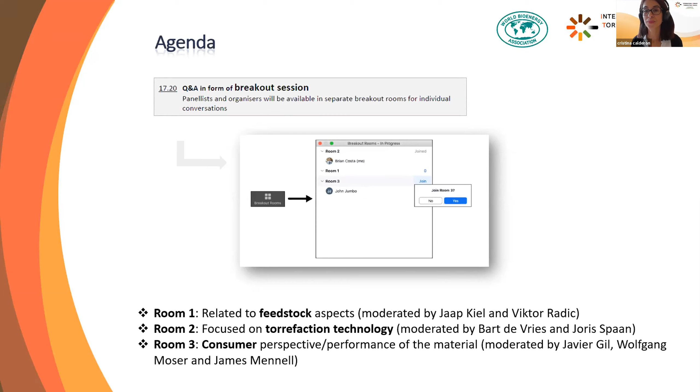On behalf of the World Bioenergy Association, our association has in the last couple of months organized a whole series of webinars on the use of agricultural residues as a feedstock for energy generation. We covered different aspects from the combustion technology all the way to the logistics, to different ways of compacting agricultural biomass. And torrefaction is, of course, one more technology to make this material, which in its original form is not very useful as a fuel, into something that is useful, that can be used in different plants, in industrial plants, but also maybe in medium and small scale plants. So I think the interest in this subject is great.

The International Energy Agency, in its scenario for net zero that was published a couple of weeks ago, which is really a landmark publication, has indicated that agricultural residues will play a very important part in the future of the world's energy consumption. Overall, bioenergy will contribute at least 20% to the entire energy demand in 2050, according to this scenario.

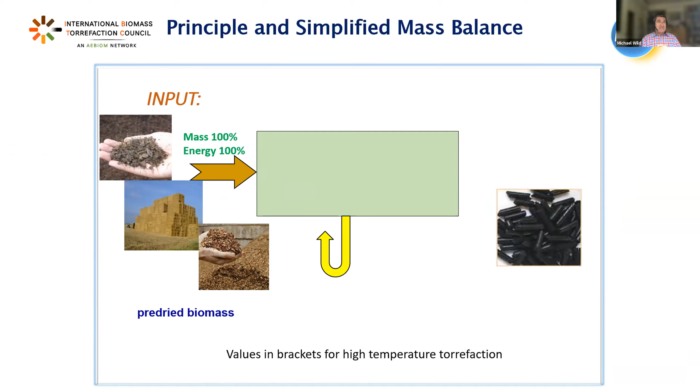So when you put dry mass into a reactor or any other device that heats up the biomass to 300 degrees or more, then you start to split the biomass, you drive out the volatile matters and you concentrate the solid matters, very much dependent on the temperature and the residence time in the reactor and also the technology applied. You achieve a mass loss of 30% combined with an energy loss of only 15%.

This is when you produce or you dedicate your production towards fuel, where you try to have a lot of the mass concentrated into the solid fraction, a lot of the energy concentrated into the solid fraction, still achieving all the characteristics of a coal or a charcoal, so brittleness, water resistance.

If you go higher in temperatures, you drive out more of the volatiles. The volatiles tend to pick up more of the energy from the input material, and your energy balance looks a little bit different. You concentrate the solid biomass higher in carbon, so the energy content is much higher and the calorific value is going to be higher. Would we go to the next slide, please?

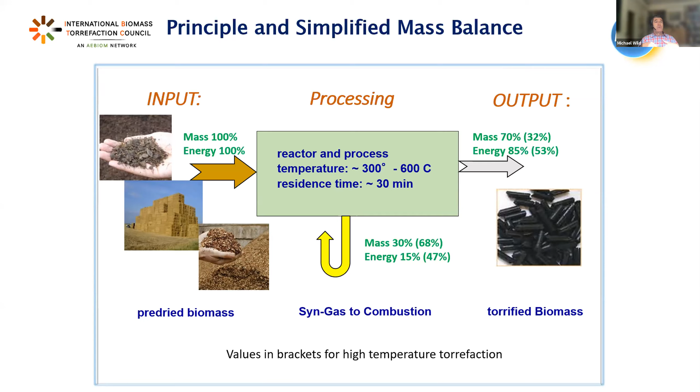We will increase the calorific value up to 21, 22, 23 gigajoule gross calorific value. That seems to be a sweet spot if product is dedicated for co-firing in coal power plants, because here we have a sweet spot in efficiency for the process and for the supply chain.

Going higher in temperature, very often the expression pyrolysis is used, and if we go even higher in the carbonization, meaning we increase the temperature to 600, maybe even 700 degrees C, we speak about carbonization or high temperature torrefaction. Here we drive out 80 to maybe 90% of the volatiles, meaning that the carbon content in the solid biomass then is 75% or more, and we fall already quite well also under the definition of charcoal.

Torrefaction is such, and we look here now into the energy balance, and I addressed this already briefly. Torrefaction, if you go into standard torrefaction, sweet spot is about driving out 30% of the volatiles, meaning approximately 21 gigajoule net calorific value of the final product. Christina, please. That provides an efficiency for the whole process of about 77%.

When we look into carbonization, it is important to understand that quite a lot of the energy is lost into the gaseous phase. So not all the energy is left with the solids, but there is a lot of energy left in the gases. Now, that from an economic point of view, but also from a sustainability point of view, means something has to happen with the gas. You need to create value from the gas, either by using it thermally, meaning running all the process for drying and the carbonization with the energy in the syngases, but usually there is a surplus in syngases, which could be easiest used by turning it into heat, which then could be turned into steam or any other purpose.

How does a plant that torrefies biomass usually look? Basically, the process always starts with driving out the water. So we always have a dryer. The dryer is very much designed for the individual feedstock, be it wood, be it an agricultural biomass, be it a belt, be it a drum dryer, whatsoever.

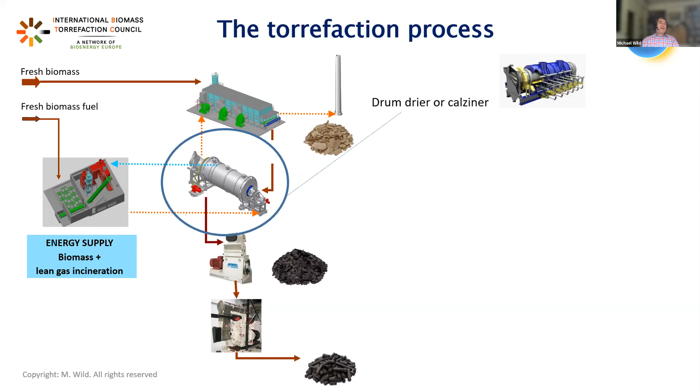From the dryer itself, the next steps are the high temperature application in maybe a drum reactor, which could be, as said, in one step or in a second step. After the thermal treatment, there is a cooling, so the biomass needs to be cooled down, will be milled, and will be compressed into either briquettes or pellets.

What kind of reactors are common today? We see that there is a big variety of different reactors. None of them can claim to be the best reactor for torrefaction or for high temperature torrefaction. There is always a trade-off between what feedstock needs to be treated to what product. And only under this framework can you define which one would be the best of the different reactors for you.

We see that we have drum dryers or calciners which are operated at high temperatures, sometimes even with microwave supplement. We have auger or screw type reactors, vibrating belt reactors, multiple hearth reactors or dryers. We also have pressurized or non-pressurized moving bed reactors, which were quite common in this type.

As said, there are different integration approaches. There are also batch processes which are not described here. The reactors here are always seen in continuous processes. For very high carbonization, we see on the other side also certain batch processes finding their way to market and being quite successful. Next slide, please.

One of the biggest advantages of integrating the thermal treatment process into biomass processing is that through thermal treatment, you homogenize biomass somehow. And agricultural biomass has more problems than woody biomass with being very heterogeneous. Thermal treatment homogenizes not only by drying, but also by eliminating some of the volatiles and some of the salts which are not so welcome in the biomass as such.

Chlorine, for instance, organically bound chlorine, will be evaporated to a very large extent, this being one of the major bottlenecks or shortcomings of straws or other biomasses with high chlorine content. We also see that the thermal treatment will allow an increase in carbon content to a level where the torrefied biomass will be applicable in processes like steel making or the steel industry.

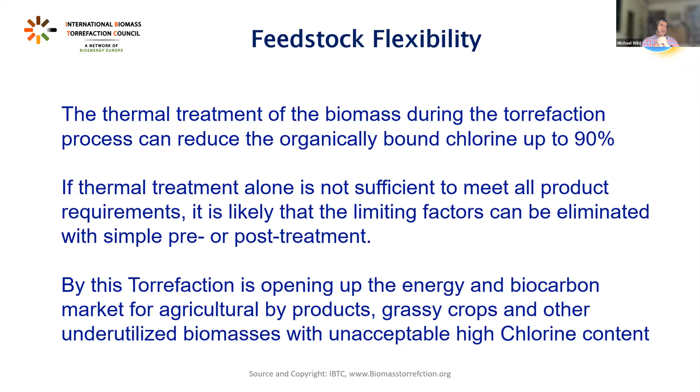We will hear in the next presentation about post and pre-treatment to eliminate some of the still unwanted elements, mostly ash components, potassium, alkali, and so on. But torrefaction definitely opens a door for agricultural biomass to the energy, but not only energy, also the biocarbon markets of the world. And we are pretty sure that these underutilized biomasses will take a more and more important position in the overall biomass contribution to a more sustainable development of our economies. Next slide, please.

We see today that biocarbons, be they lower or higher carbonized, are traded either in the form of pellets, the standard pellets like in the white wood pellet industry, 6 to 12 millimeters, as agglomerated pellets, which is mostly in the biochar or in the processing industry, interesting because here we don't have a very high bulk density, or in a briquetted form, be it piston briquetters or roller briquetters in different sizes.

Torrefied biomass needs to be densified for cost reasons, but also for safety and health reasons. If not densified, it might not be transported on bulk vessels. Next slide, please.

We see that the starting point for all of us, to address the coal power plants, to substitute coal and contribute to the role that white wood pellets have already played in substituting coal in coal power plants, is still our volume product, but it is less and less important. More and more niche products, more and more other sectors in the industry are starting to demand torrefied, carbonized biomass for their processes. There are certain niches like biochar or fertilizer.

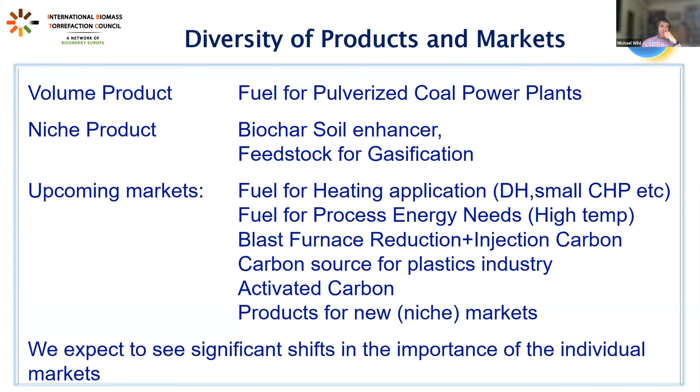Torrefied biomass is integrated into the ISO 17225 solid biofuels family. So it is, as seen here, very much focused in the standardization on fuels. However, this to date technical specification is currently under upgrading into a full standard. And in this process, there will be an opening and more flexibility towards other sectors as well.

So not only as a fuel, so there will be, and this is to be seen and discussed in the next 2 years, there will be additional classes that will focus on other industries, not only the coal power plants. Next slide, please.

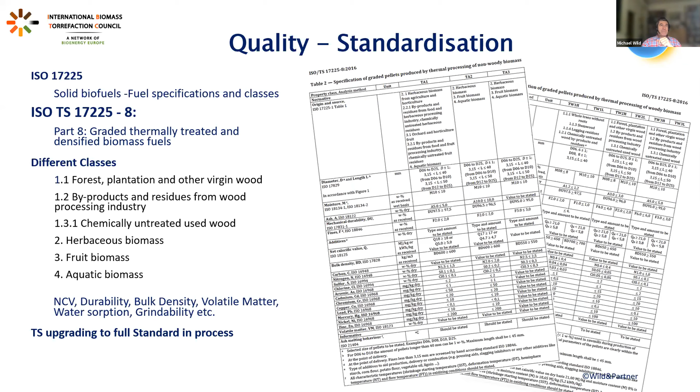Before I come to a conclusion, one more important aspect on torrefied biomass. We see that for all of our biomasses which are transported and consumed at the site of last consumption, we have to prove how much energy has been used and how much emissions have been caused in the whole supply chain. Now we have here compared the emissions cost and the energy used in the supply chain.

Here we have the blue lines in this cobweb comparison, which is the reference whitewood pellets, 100%, and the orange line shows how much energy in each of the links of the supply chain is consumed by torrefied pellets in the chain. You see that on average about 20% less energy is consumed, meaning 20% less emissions are caused,

which is giving added value to the torrefied product for the final consumer, because the final consumer's value of a product of torrefied biomass is closely connected also to how much CO2 substitution, when substituting coal by torrefied biomass, they can record and they can prove.

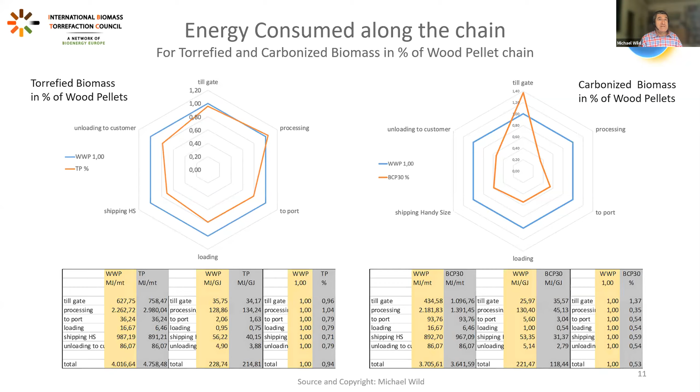So you see in logistics, there is a large savings opportunity when using torrefied and carbonized biomass, let alone that these products can be handled in the open, can be handled in the rain. So there is a lot of additional savings in investments in harbor infrastructure or at the consumer's side. Next slide, please. And this is already my concluding slide.

Just wanted to repeat here quickly. The thermal treatment really does open for agricultural biomass the door into the international biomass value chains, be it for energy or other processes where we can substitute conventional carbon.

The processes that need to be applied will be mostly single step, but can be also multiple step processes, very much depending on what is needed to connect the feedstock basis with a certain product quality that is required by the consumers.

And this also provides the aspect that if we split the process, so if we have value created from the gaseous phase on the site of origin of the biomass, we create there also infrastructure. We do not export all of the biomasses to the consuming countries, but also in the rural areas where usually the biomass is available, we have a potential that this value chain leaves value and helps to create infrastructure.

The reduced sustainability concerns for agricultural biomass and byproducts in respect to forestry biomass will help the overall sector also to keep its very positive image and contribute significantly to the overall energy balance of the global economy in the future.

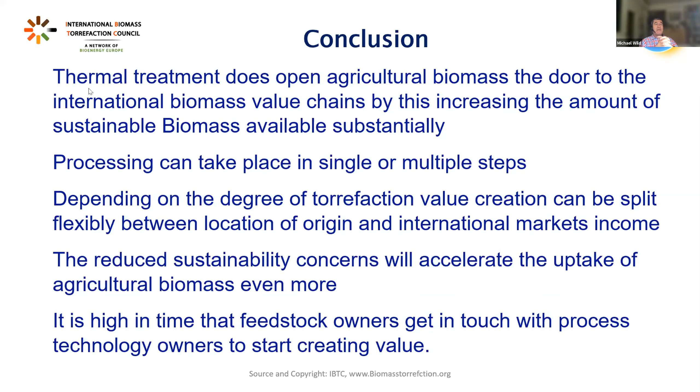Thank you, Michael. Before going to Jaap, and because we are 4 minutes ahead of the schedule, we have one question that you partly addressed already in your presentation, but maybe to clarify again. One of the participants is asking, what is the main difference between carbonization and torrefaction in terms of energy content and energy input? Do you want to?

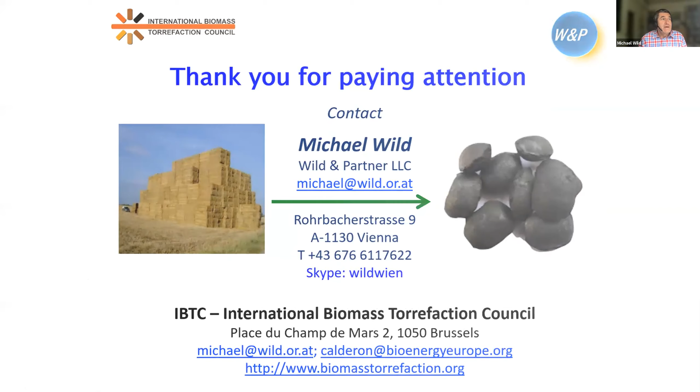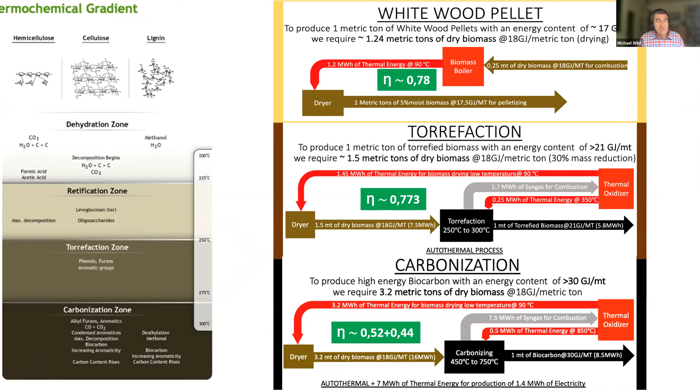Yes, you can go back up. I think it was slide number 4. Basically, the energy content, you can always concentrate the energy which you have in the feedstock. But if we have a feedstock that on dry basis usually has an energy content, further up, please, Christina. To the carbonization graph. If you have an energy content of about 18 to 18.5 gigajoule per metric ton dry on a certain biomass, then just to the carbonization curve, Christina, please, 2 slides up.

Yes, sorry, before. Then you would concentrate in a typical low temperature torrefaction process, which is around 250 degrees C, to a net calorific value of approximately 21.5 gigajoule per metric ton. Be aware this curve is in gross calorific values, so it differs by a couple of % from the numbers I'm saying now. So in torrefaction, you would typically achieve a gross calorific value around 23 gigajoule, meaning net calorific around 21.5. While in carbonization, you concentrate the carbon contents in the material further.

So you might go up to 33 gigajoule per metric ton gross, meaning about 30 to 31 gigajoule per metric ton net. The energy consumption: in torrefaction, the gases which are evaporated usually are used to fuel the process itself and to substitute energy that is needed for the drying of the feedstock. Therefore, the process is self-sufficient. There is no excess energy available.

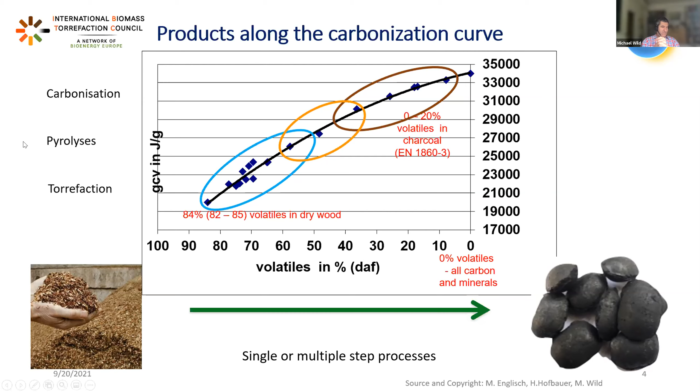I hope that was a clear and sufficient explanation. Otherwise, we can happily discuss later in the Q&A. Yes, very detailed. Thank you very much, Michael.

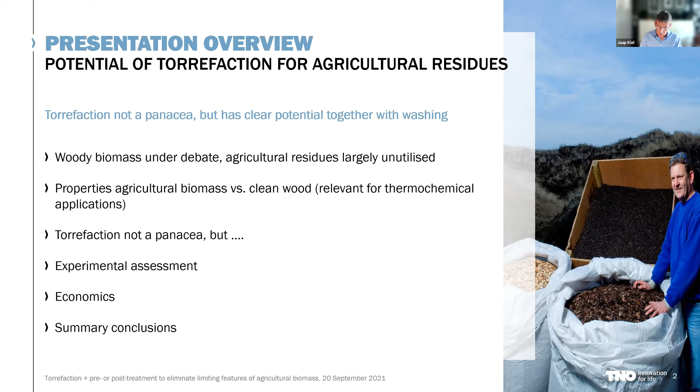To clarify this conclusion, I will start first with the general issue that woody biomass is under debate, that agricultural residues are largely unutilized and really are there in very large quantities. Then dive into the properties of these agricultural residues versus clean wood. Look at what about torrefaction as a solution, and then illustrate that with a quite detailed experimental assessment we did at TNO, including economics, and then come to some summary conclusions. So first, you all know woody biomass is quite under debate. I think you all know examples of that.

And that has led, for instance, when you look at the EU Fit for 55 package, to meet our EU targets in 2030, to a reinforcement of the criteria for forestry-based biomass and bioenergy. So it will be prohibited to source biomass for energy production from primary forests. No support for forestry biomass in electricity-only installations as of 2026. A prohibition of national financial incentives for use of logs, stumps, and roots for energy generation.

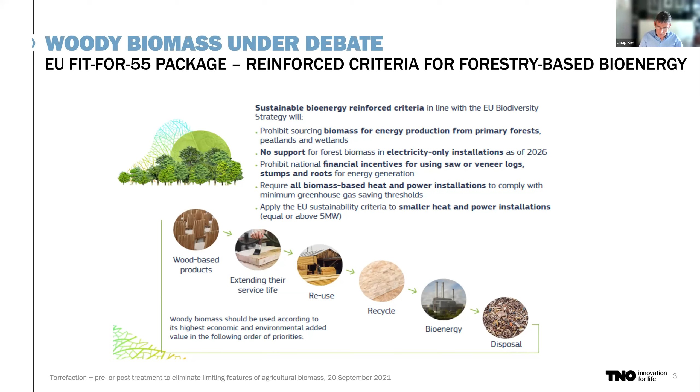All biomass-based heat and power installations should comply with minimum greenhouse gas savings thresholds, and this will also apply for relatively small installations. So there is increasing pressure on woody biomass. But then if you look at the potential of different biomass sources, let me go back.

Then you see here an overview of different studies, a figure that was published in the Bioenergy Europe statistical report of 2020. And you see in orange the enormous potential of agricultural biomass if you compare it to, for instance, the forestry biomass, which is in green. And this has been compiled by my colleague André Faaij.

So you see there is really an enormous potential, and you also see when you look at the numbers for 2018 that this potential is hardly utilized at the moment. So we may expect an enormous growth of the use of these agricultural residues. However, that is not straightforward.

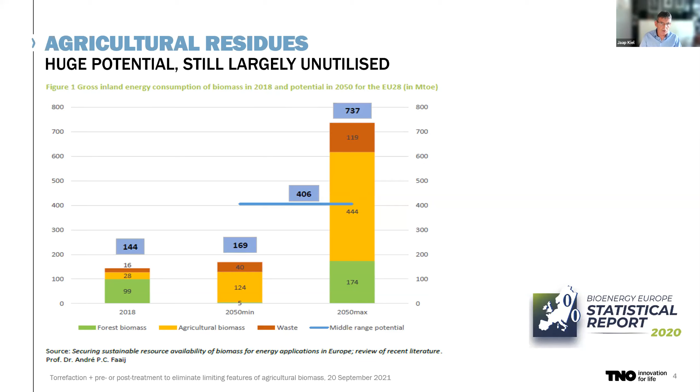Because when we look at the properties of agricultural biomass, you can say it's a quite difficult feedstock. Well, what is this? If you compare it with woody biomass, generally it has lower density, inferior transport, handling, and storage properties. For instance, if you think of straw and empty fruit bunches.

We see a pop-up window for the breakout rooms, or it's only me. Sorry, it's only on my side. Sorry. Okay. I see some things popping up now and then, but anyway.

As I said, lower density, difficult storage, handling, and transport properties. In general, a higher moisture content, and that poses a severe energy penalty when you have to evaporate that moisture. In general, the inorganics content is higher, and these inorganics are also more problematic. For instance, when you look at chlorine, alkali metals, sulfur, heavy metals, which may lead to pollutant emissions, slagging, fouling, corrosion, catalyst poisoning, so a lot of difficulties also in the process itself, and also a negative impact it may have on ash utilization.

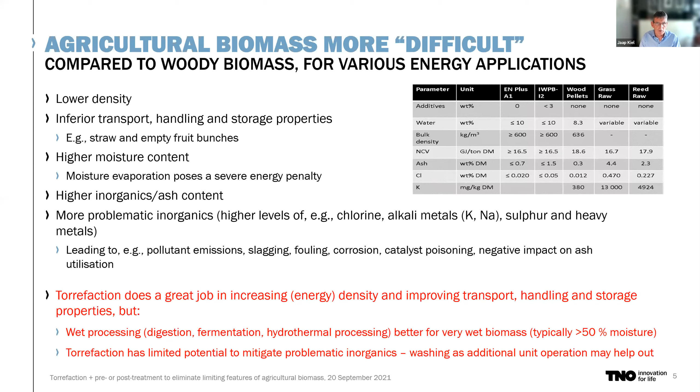And so if we look at torrefaction and washing, then first of all, I think it's important to make the statement that it's essential to optimize the overall process layout. So minimum freshwater consumption is essential. So washing water recycling should be included, preferably countercurrent washing to make it more effective. Dewatering after washing should be paid a lot of attention to. And clearly, we should pay proper attention to the washing effluent. I will go into detail concerning this somewhat more later on.

Well, you could, of course, do two things. You could do torrefaction and pre-washing, so first wash and then do torrefaction. That leads to quite good solubility of these inorganics and thus higher removal efficiencies. But the dewatering will be rather difficult because the material is not hydrophobic yet, which it becomes upon torrefaction. And so that also means energy consuming. In general, this is a preferable route for relatively wet biomass, but still below the 50%.

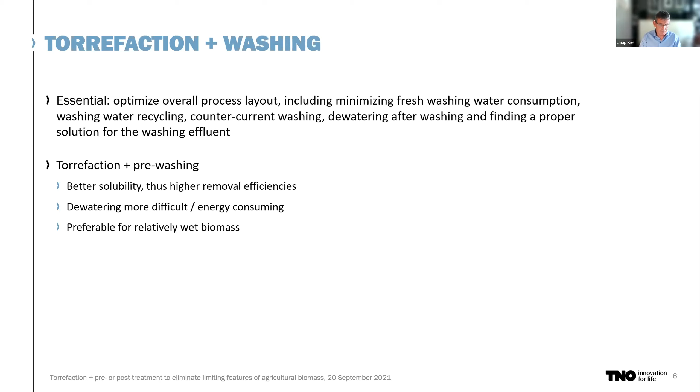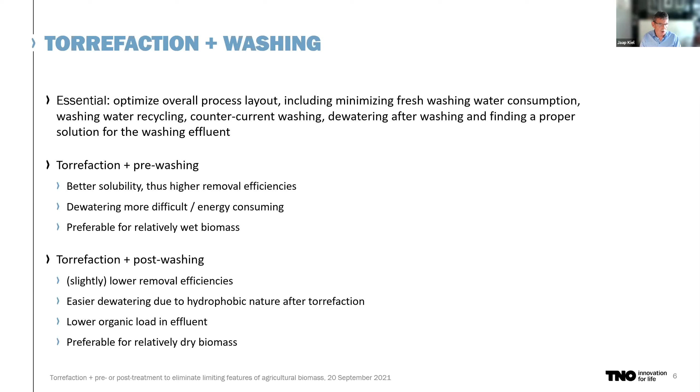You could also do torrefaction and then afterwards wash the material. That leads to lower removal efficiencies, although they might be only slightly lower depending on the feedstock. It leads to easier dewatering due to the hydrophobic nature after torrefaction. It also leads to lower organic loads in the effluent, which makes effluent treatment easier. And this may be preferable for relatively dry biomass.

Well, I would like to illustrate this and dive into more detail by showing some results of a quite detailed study we did on this combination of torrefaction and washing. In this study, we looked at various types of agricultural residue. And I would like to acknowledge my colleague Pedro Abelha, who did a lot of the work in this study.

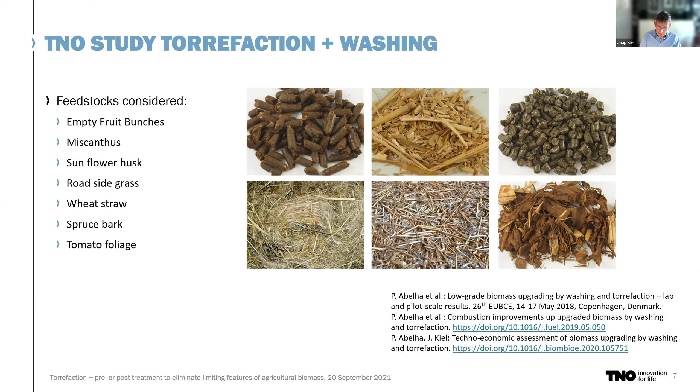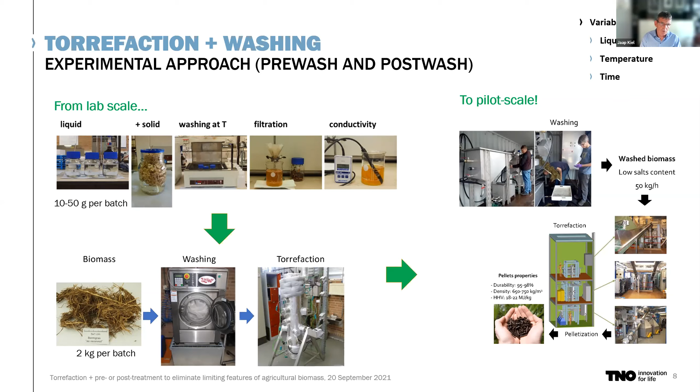So in terms of experimental approach, we did experiments at three different scales, from lab scale to bench scale to pilot scale, and always combined torrefaction and washing, both pre-wash and post-wash.

Well, first of all, if you do this and you look at the mass and energy yield and the heating value of the material, basically you see similar things as for torrefaction of woody biomass. You see an increase of the heating value. You see relatively limited mass loss and a high energy yield. And of course, it depends on the combination and the conditions how the numbers will be exactly, as Michael already showed.

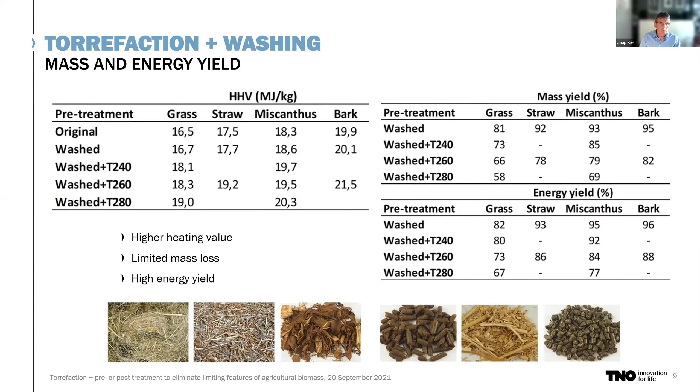And in general, we can say that torrefaction has limited effect on chlorine. The organic chlorine it may remove, but the inorganic chlorine, for instance in the form of potassium chloride, will in general not be removed by torrefaction. And torrefaction also has little effect on potassium.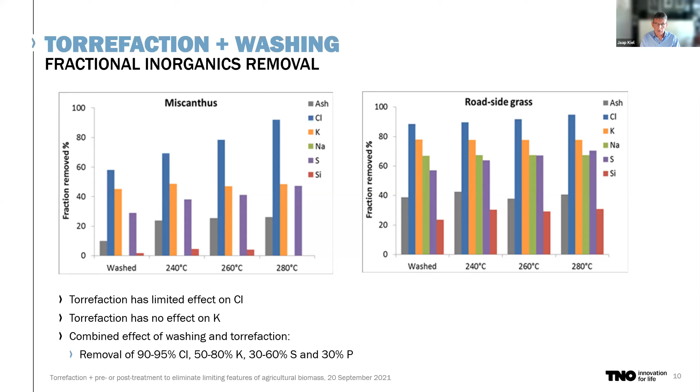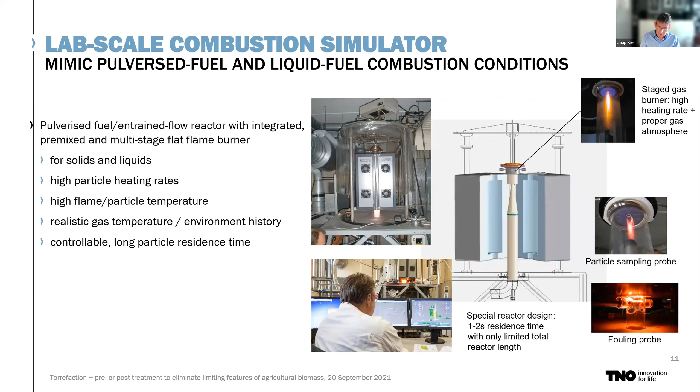Now, to look at what this means in terms of thermochemical conversion: we did some combustion tests in a small combustion simulator where we can mimic pulverized fuel combustion conditions very well. We use that installation a lot, and we know how it compares to large scale operation. And we did various tests in this installation. And here you see one of the results.

Here you see where we looked at particulate emissions for roadside grass. Left the roadside grass itself, and to the right upgraded roadside grass, so in this case pre-washed and then torrefied. And in general, you see that the share of submicron particles, so very fine emissions, becomes much less after upgrading. And you also see in the table the results for some other feedstocks. So in general, you see a quite substantial reduction of submicron particles after upgrading.

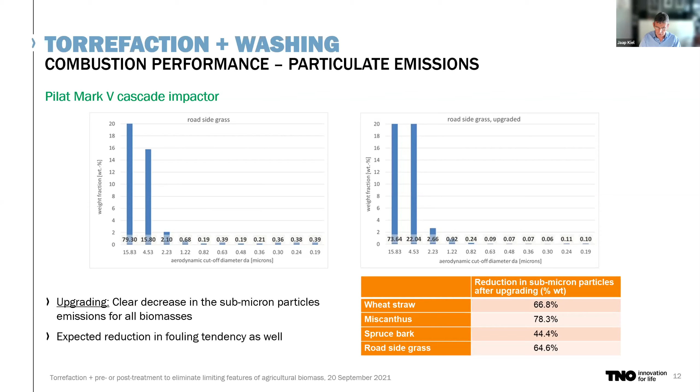And this is something that in general with agricultural biomass is quite an issue. It is also an issue that will become more important in the near future. And you see here the clear prospects of torrefaction plus washing to do something about that. And that also has a clear impact on the fouling propensity.

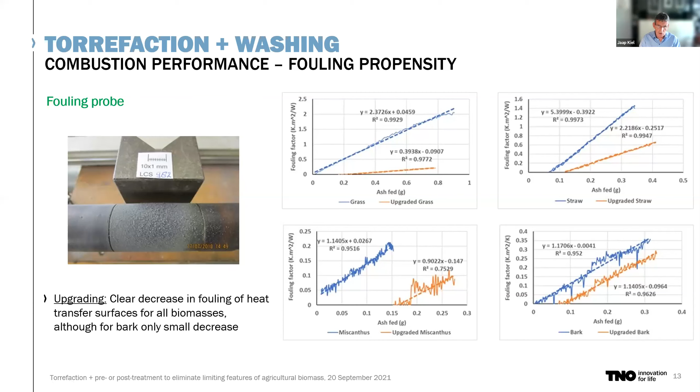So we did some tests where we had a fouling probe, simulating a boiler tube, and looked at the degree of fouling depending on whether you have the pure biomass or the upgraded biomass. And you see here in the graphs that the fouling propensity decreases significantly when you do the upgrading. So much less fouling issues after upgrading.

Well, then we moved also towards looking at the economics. And for that, of course, first you have to translate these experimental results into an industrial process. And that's what we did. We looked at such a process at different scales. And here you see an example where we looked at a process for roadside grass, 120 kilotons per annum dry biomass input. And we designed the process as such.

So first a washing step, then mechanical dewatering, a thermal dryer, a torrefier, and a pelletizer. And connected to the washing step, there was an anaerobic digester, as well as a dedicated water treatment plant. And this all is needed to treat the effluent in a proper way.

We not only looked at roadside grass as such, but we also looked at silage storage. So to first do the silaging process, and then look at the behavior of roadside grass in such a plant as well. And this to overcome seasonality. Of course, roadside grass is only harvested during part of the year, and if you want to operate such a plant the whole year round, then this might be an option.

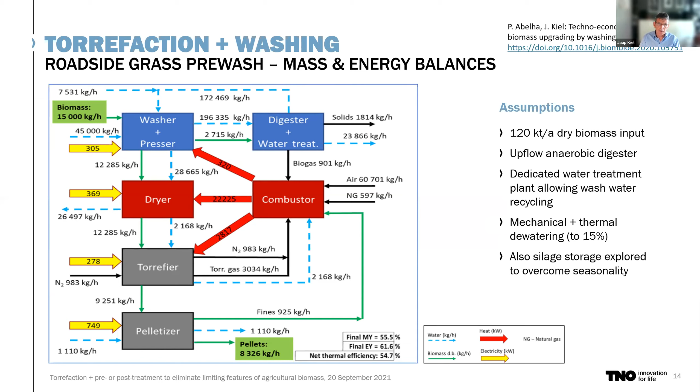Well, we did detailed mass and energy balances for such a plant, and on the basis of that, we did the economics. Here you see one of the results, and more details you may find in the publication, for which the references are indicated. Basically, we found that for a case in the Netherlands, and of course all these results are very case specific, where we assumed a plant size of 100 to 150 kilotons per annum and a negative gate fee of 25 euros per ton, that led to a quite attractive IRR of 15.6%.

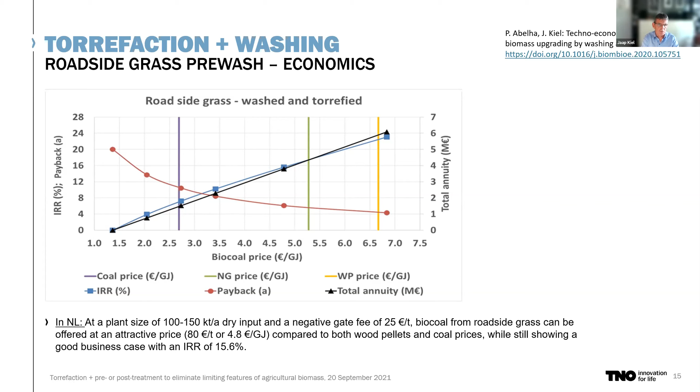Assuming a price for the biocoal produced of 80 euros per ton, which could be quite attractive compared to both wood pellets and coal prices. So here you can see that there is quite a reasonable business case, despite all the measures you have to take with the washing, as well as the cleaning of the washing effluent. Despite all that, you still can have attractive business cases.

So in summary, I would say agricultural biomass has a huge potential. It's largely unutilized, and there is a large potential there, but the properties are in general more difficult than woody biomass. Torrefaction as such is not a panacea, but a combination with washing may help out and has clear potential. It's essential to optimize the overall process layout, as I indicated.

And in general, you could say that the pre-wash is preferable for relatively wet biomass and a post-wash for relatively dry biomass. And attractive business cases appear feasible, but of course, they are largely dependent on local conditions.

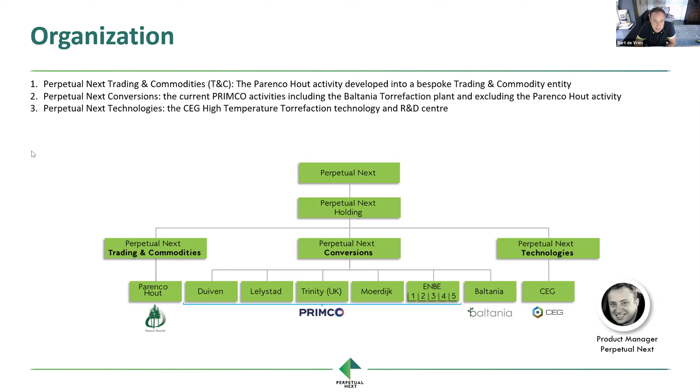So it is a kind of a challenge to come up with what is the most interesting feedstock. Well, you cannot say that. That depends on the bias, on the way you look at that type of feedstock. But obviously, we are looking at the feedstock on availability, on cost price, as well as if it matches our torrefaction technology process, as well as the performance of the torrefied material in the application, specifically when we look to biochar options.

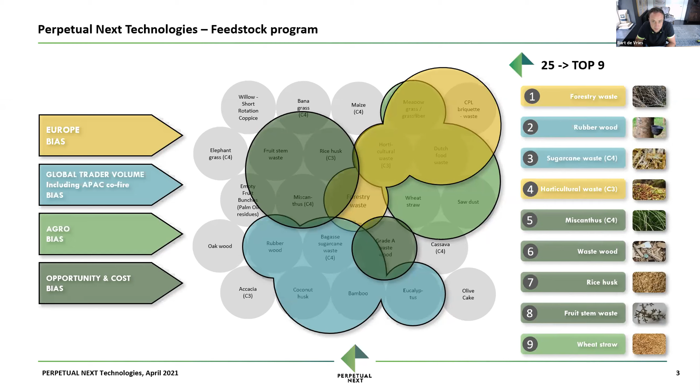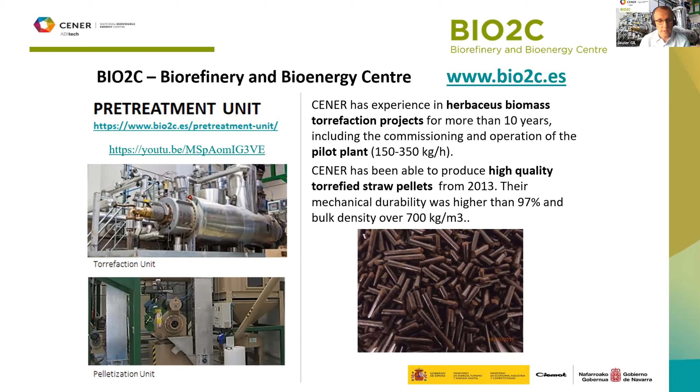We have two pilot plants. One pilot plant for torrefaction with this 150 to 350 kilograms per hour capacity, depending on the feedstock and the product characteristics you want to get at the end. And also a pelletization unit, a 30 kilowatt ring die pelletizer, in which we have a lot of experience with a lot of different biomasses and different products, and huge experience in order to scale the pelletization process of torrefied biomass. Next, please.

Now we are focused on developing a technology that wants to produce reliable and competitive biofuels from residual agricultural biomass, mainly focused on the next market demand, in our vision industrial sectors with intensive thermal energy consumption. The technology combines torrefaction with other processes to eliminate certain unwanted inorganic elements, as Jaap Kiel has already mentioned in his presentation.

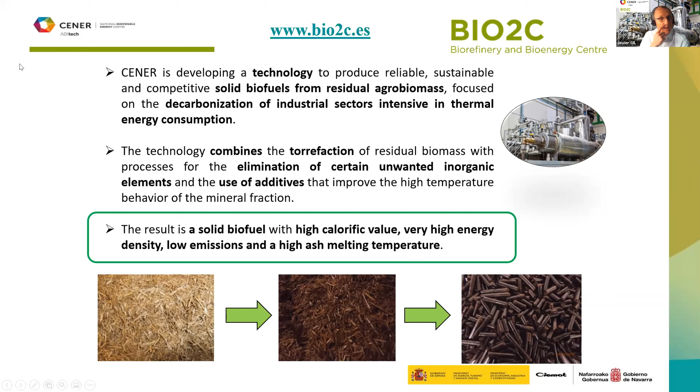And when needed, depending on the end use process, additives could also be used to improve the high temperature behavior of the mineral fraction. At the end, you get a solid biofuel with high calorific value, very high energy density, low emissions, and high ash melting temperature. Next, please.

We have already reached pilot scale, proof of concept pilot scale. We have produced up to 2 tons of product in different batches with 67% potassium content reduction, more than 95% chlorine reduction, and 57 in the case of sulfur. All the tests were carried out with straw. And we have carried out the industrial techno-economic assessment for a production capacity in the range from 58,000 to 116,000 tons per year, and we got a production cost in the range from 27 to 32 euro per megawatt hour. Next, please.

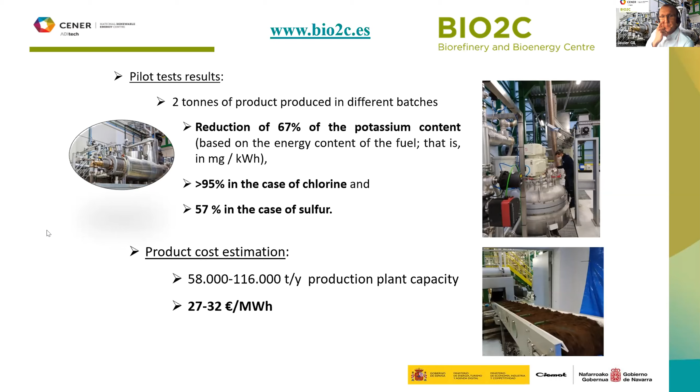Thank you so much. I'm available for any question about this development.

Javier, just one quick immediate question. Could you just let us know what is your offer now to the market? You described your research and development. What is the offer to the audience? Okay, due to the limited number of slides and the time, I couldn't explain.

Okay, next steps for us is to carry out long-term tests to produce up to 10 tons of product, and to start testing with end users of this product. So next step for us before licensing technology in the future is to validate the product performance with end users and validate the process performance in longer tests at pilot scale. Thank you very much for this explanation.

You're welcome. Yeah, so addressed to all, Javier will also be available then in the Q&A session. Just choose his part to address him directly. And by this, we are moving on to another technology company, Yilkins, a Dutch company represented here by Joris Spaan. Joris, the floor is yours. Please introduce your technology and company to us and what your offer is.

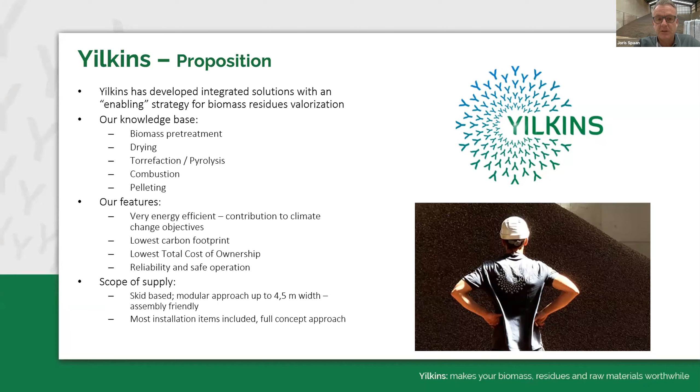Of course, it is very important to do it very energy efficient, because it's all about energy and using less energy than we do today. So that's also how we engineered our drying and torrefaction process. Very simple and easy. Next slide, please. This is the core of our technology. It's the swirling fluidized bed technology. Mechanically, it's a static reactor, so there are no moving parts. It's a small footprint, compact, safe and flexible design.

Safe because we don't use oxygen in the fluidized bed reactor itself, and that's of course taking away the chances of fire and explosions. Very fast heat transfer, so short residence times in the reactor itself, and not unimportant, it's TRL level 8, so the system is complete, qualified. We have a bankable solution. Due diligence is done by DNV GL. And also we have some guarantee support on the performances that we perform.

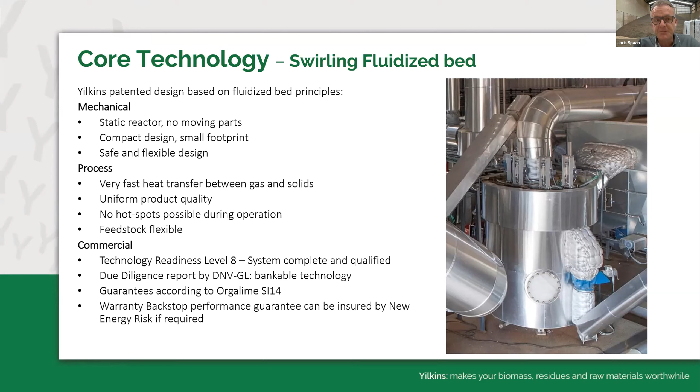Next, please. A little bit of our experience with some herbaceous biomasses. On the left side, you have seen them before, the wheat straw. In the middle, miscanthus, banagrass, arundo, all different kinds of grasses. And on the right side, Jaap Kiel told you a little bit about it, it's the roadside grass that we also did torrefaction on and produced a perfect industrial pellet within specifications. Next slide, please.

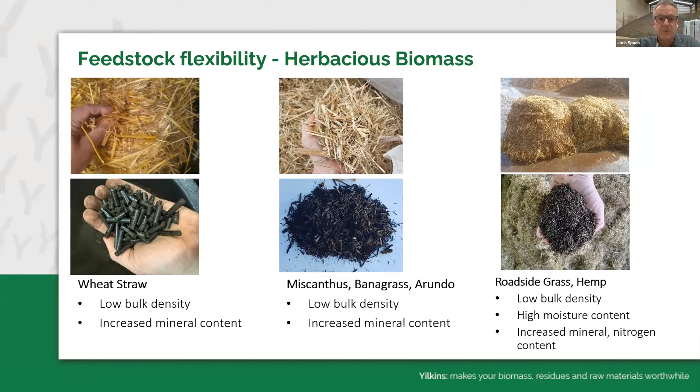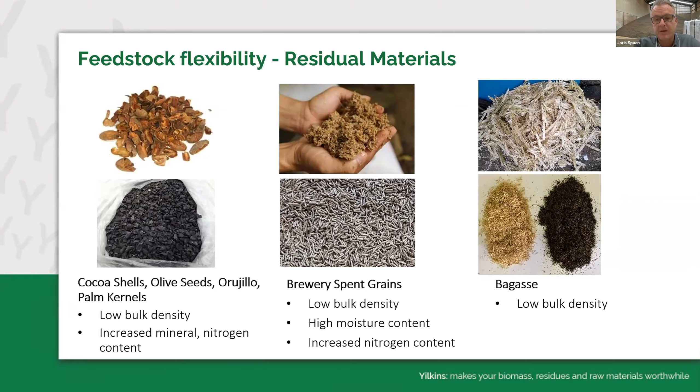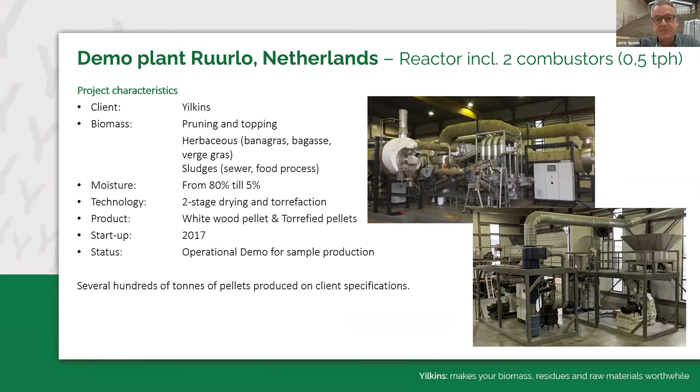Thank you, Joris, for this quite quick introduction of your technology. One of the technologies, and that is interesting, and I like to highlight this here. I mean, all of what we have heard till now, and also what we will be hearing in the next presentations, is also just proving that torrefaction really has made it from the development scale to the industrial scale. We have TRL 8 levels. We have industrial plants which have started operation, which are in construction.

And I think this is also one of the messages that need to be taken home. Torrefaction is an industrial technology that is proven and that can be implemented now on almost any scale wanted. By this, I would like to pass the word to Viktor Radic. Viktor Radic is representing Polytechnik, and Polytechnik has a very unique technology. I think Viktor is going to share this aside of a general introduction of the company with us, focusing on the highest purity of carbon and quite high concentration of carbon in their product. Viktor, the floor is yours.

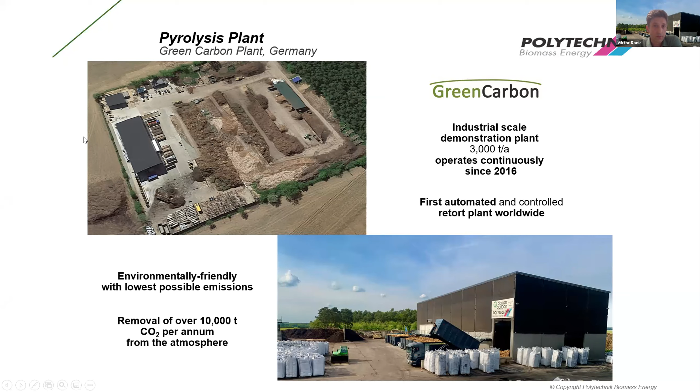We produce high carbon content carbonized biomass, so we can reach between 80 and 95% C-fix. Very stable product. We have experience with agricultural biomass. Next slide, please. We have done different sorts of biomass residues, from corn cobs to wheat straw, corn stalks, miscanthus, different grasses, herbaceous biomass. Every one of them can be carbonized. It all depends on what the final product needs to be and how efficient the process is.

What we have found out is that the one disadvantage of this process, high temperature carbonization with agricultural residues, is the volume or the output. Because of the lower bulk density of agricultural residues, we can expect higher handling costs at the feedstock side and also at the final product side. So the bulk density reduces the conversion ratio.

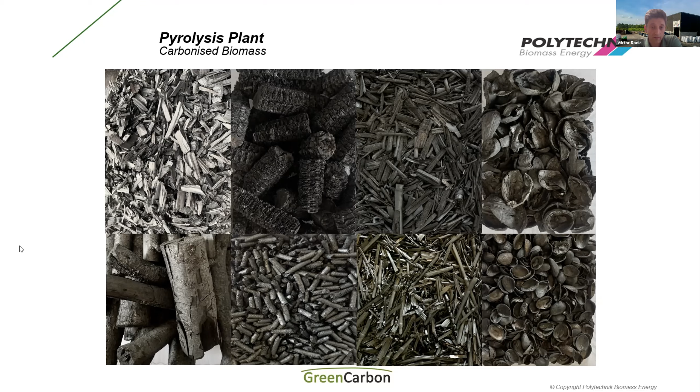So if you want high volumes, high outputs, then we believe carbonization is not the solution for agricultural residues, but rather maybe a continuous process like torrefaction. However, if you're looking for high carbon content, carbonized agricultural residues for non-energy use, then it could be a solution for you. So we'd be happy to discuss it and test any feedstock you might have in mind. Next slide.

So like I said, our main products, or our niche markets, are not the energy market, although charcoal might be considered as some sort of a fuel. It's a small segment of the output that the plant produces. We do terra preta, animal feed, or additives, and these are just some of the applications of woody and non-woody biomass that are possible and out there.

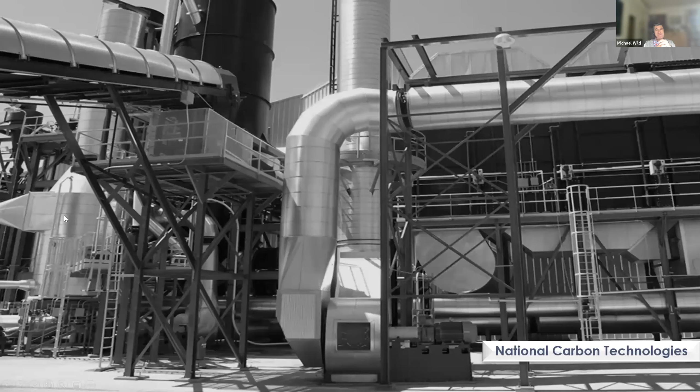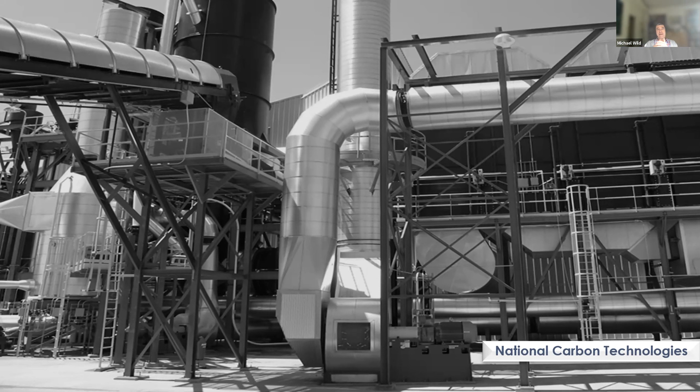We have James Mennell with us from National Carbon in the United States, being in this board now the only representative from outside Europe. However, let me confirm that the IBTC has more members than only one from outside Europe. So torrefaction is not only a European initiative, but you see this globally. You see a lot of companies and initiatives in North America, in South America, in Asia, even in Australia and New Zealand, but still leading a little bit is Europe.

But we'll see now from James how advanced his installations are, and that National Carbon is one of the largest installations in high carbonization torrefaction processes currently active. James, the floor is yours. Hi, good afternoon. James Mennell, CEO of National Carbon Technologies. And Christina, could you go to the first slide, please?

National Carbon Technologies, or NCT, is an environmental technology company based in the United States. We develop and produce advanced biocarbon products from a range of sustainably sourced biomass. Our products are engineered for use in a range of different global markets, including energy production, metals production, agriculture, and importantly, water purification. Today, we operate the largest advanced biocarbon production facility in North America and have been supplying customers commercially on a global basis since 2012.

We hold the largest intellectual property portfolio around biocarbons in the world today, with over 200 patents that I think reflects both our innovation and protects our process and our product technologies. Our technology was specifically designed for beneficial conversion of agricultural co-products into biocarbon. To that end, we're actively building over 500,000 tons per year of new production capacity that will be online in 2023 that will use primarily agricultural residues as the feedstock.

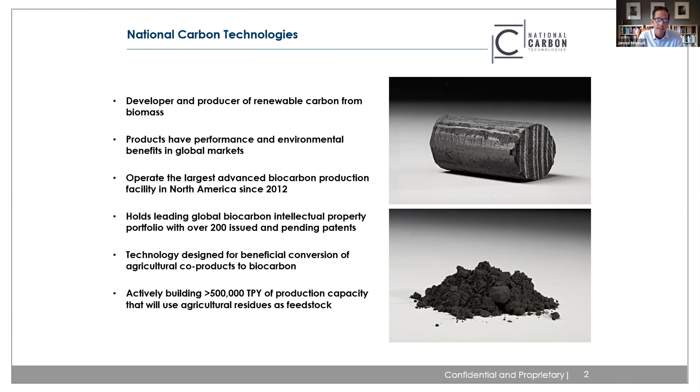Next slide, please. Our technologies were developed by a unique group of thought leaders from the biotech space, including top engineering and science leaders from the largest biofuel and bioproduct companies in the world, including Cargill and Poet, and experts from leading research universities, including Stanford and MIT. Our focus has been on the high temperature pyrolysis side. We use state-of-the-art process controls and try to manage the reactions inside a reactor to drive different performance.

One of the advantages of going to higher temperatures in the 550 to 700 C range is that we're able to completely break down the biomass into carbon, which allows us to use a very broad range of feedstock and reduce it into a very consistent and homogeneous carbon product, regardless of the type of feedstock. To deal with the unique attributes of agricultural residues and co-products, we use mechanical separation on the front end of our process, and proprietary catalytic elemental reduction technologies that only work at higher temperatures to target and reduce unwanted characteristics, including alkaline salts and some of the metals inherent to a range of agricultural feedstocks.

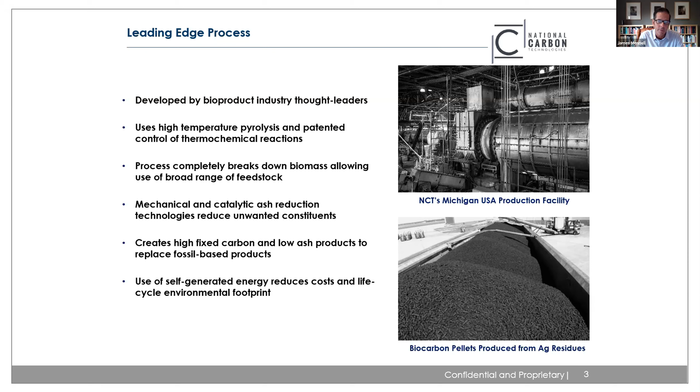Our process ultimately results in high fixed carbon, low ash products, engineered to be drop-in replacements for fossil-based products like high-grade coals like anthracite and cokes as well. And because we operate at high temperature, we have an abundant amount of self-generated biogas, as Michael had articulated in his presentation, that allows us to both reduce production costs and have a very low life cycle environmental footprint with self-generated bioenergy. Next slide, please, Christina.

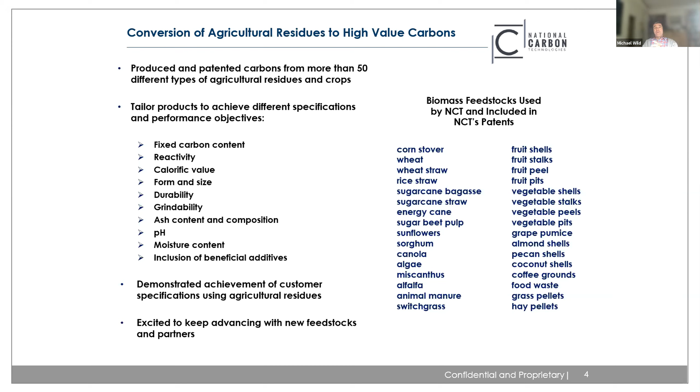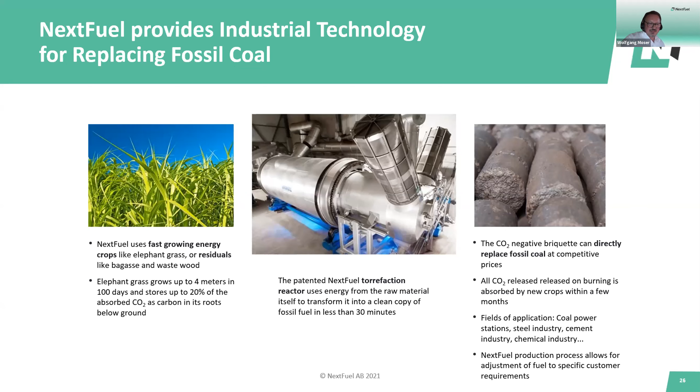So in the lab we could reduce up to 80 or 90% of the minerals if required, but it's an economic question to say how much do we need to reduce, and that's the driver for setting up the right parameters for this washing and drying process. But that's number 1, ash content, chemical composition. Yes, this can be influenced also in a large-scale production run, and that's what we have proven here. A second topic, Christina, next slide, please.

And our experience was, on the one hand, you can optimize many little things in the whole conveying system to get over this problem. But the other and more interesting experience quite recently was to apply pre-densifying. So in fact, when getting extremely light material, we found out it's also a good option to apply densification first. This can be done, for example, by standard pelletizers, and then use the densified material throughout the rest of the process. Of course, then you don't even need a densification step in the end.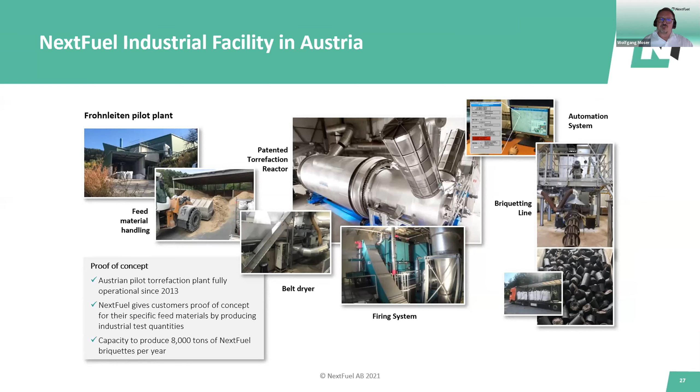So if this is one of the specific hurdles, and in some cases the feed material can come at very, very light bulk density, then pre-densification can really be a solution to it. And the third topic, when I go to the next slide, is one that we experienced also in our first commercial scale project.

We are in the engineering and permitting phase for a large scale implementation in Finland, and the feed material used there are forest residuals. Now with forest residuals, it's similar like with other agricultural residuals also. You get a mix of quite different things. And inhomogeneous feed material is always a challenge because you have different elements reacting to different process parameters differently.

So in that case, we feel that applying some pre-processing steps, simple steps like screening, for example, sieving out fine materials to get a better and more homogeneously defined feedstock is a potential solution which drastically improves the quality of the end product.

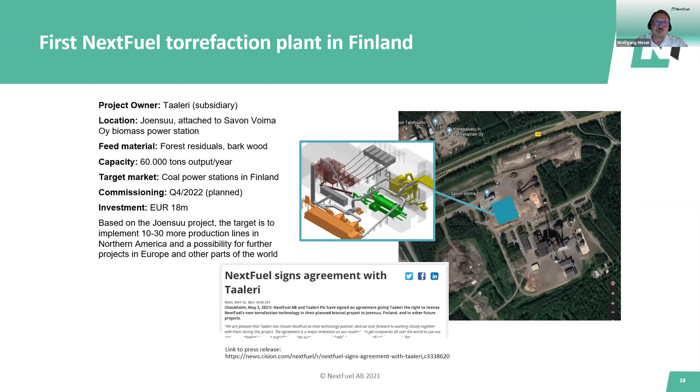So these were my 3 topics to share with you, because I feel we've heard a lot about torrefaction process as such, but the specific challenges for residues are like this: ash content, specific weight, and homogeneity of the feed material. Any more questions in the discussion rooms?